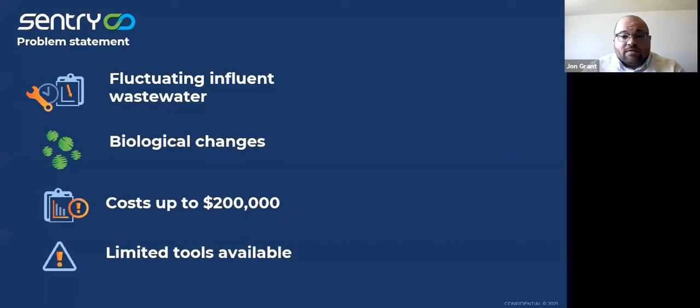And so with that, currently that's difficult. There's fluctuating influent wastewater, biological changes, and that leads to issues at the treatment plant, or in the process, that can cost hundreds of thousands of dollars. And that's because there are limited tools available, because ultimately existing and traditional sensors get covered in biofilm and have biofouling issues and have to be maintained quite often. We estimate that costs $7,000 a year, and lots of time spent cleaning and waiting for sensor drift.

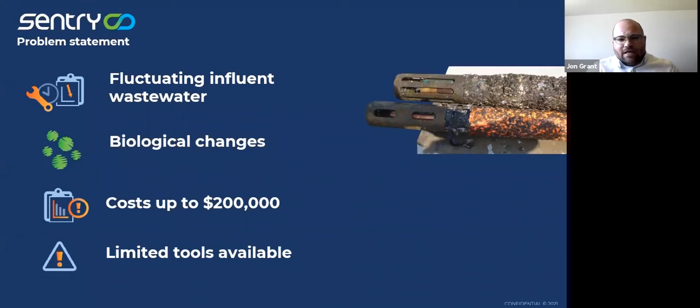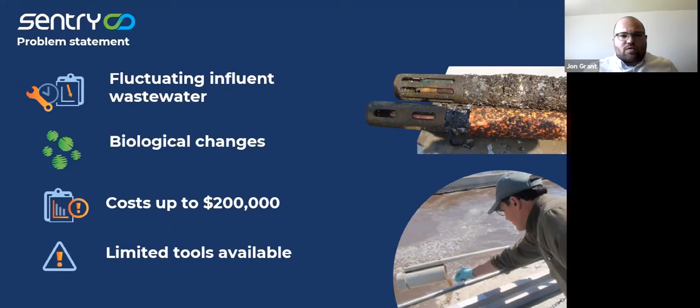So where biofouling causes other methods for getting information to fail, biofouling is actually what makes SENTRY work. So first we'll do a quick overview of what's in the system, and then we'll get into our top 5.

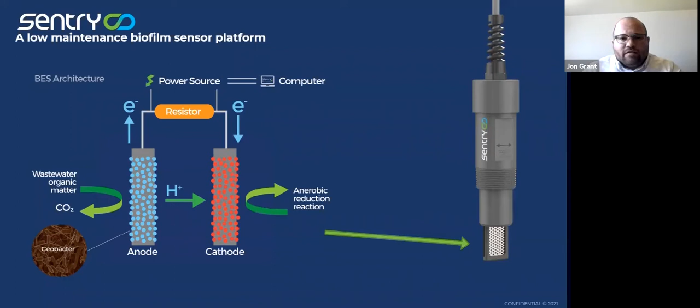At its heart, we've got 2 flat metal sheets that we prime with a small voltage to receive respired electrons from the biology as it consumes carbon. So essentially we're providing a real-time monitor to understand the biological health of the incoming wastewater, or of the plant to treat the incoming wastewater.

It comes as a standard with a panel, NEMA 4X rated for outdoors, 2 probes, SIM card connection, and it's generally plug and play. And then we typically install in channels, or really anywhere where there's a good flow that's representative of the wastewater at that current point within the plant or process.

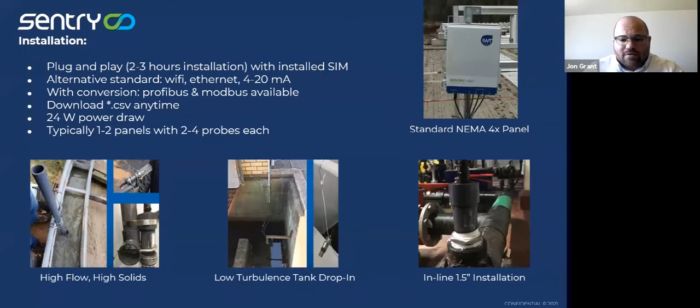And so we've got clear problem statements in a number of areas, all the way from the collection system to the effluent point. About 85% of deployments start with or include a primary clarifier or headworks type location, because it's a good place to really get a feed forward signal for what's coming into that plant, so you can actually make informed decisions about how you're going to treat that wastewater when it comes into the plant.

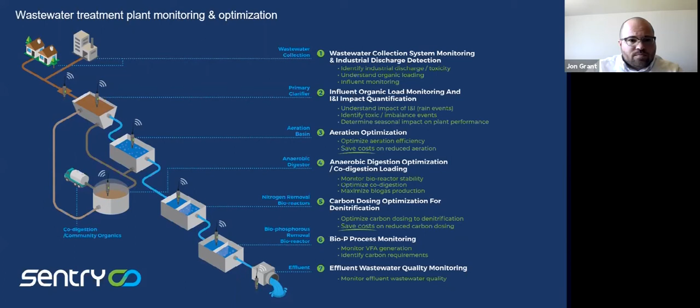Just to cap that part off, as water or wastewater flows over the probe, the biology on it is consuming carbon. So if you get a huge slug of BOD, you'll get a lot more food for the biology, and you'll see the signal go up. If there's a dilution event or toxic inhibitor, there's less food available for the biology, or it's less able to consume the available food, and so you'll see a drop in the signal. It's really like a heart rate monitor for your ability to treat the incoming wastewater.

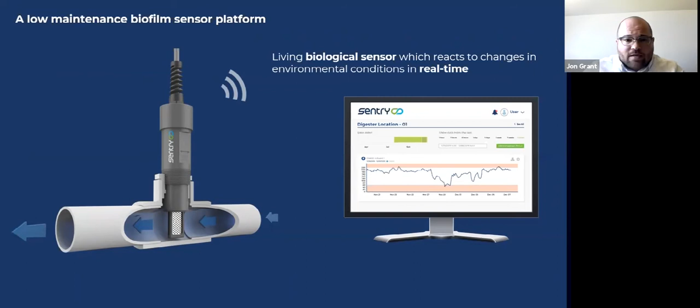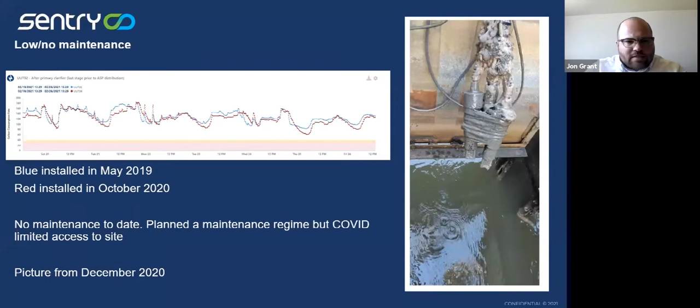And so with that, it's been a very big year. At this time last year, we had just over 55 installations. At this point we're now across North America, quite far into Europe, quite a bit in Asia, starting to get some work in Brazil, and our most recent deployment that sort of filled out the map was Australia. And then one day, hopefully Antarctica too, to complete all the continents.

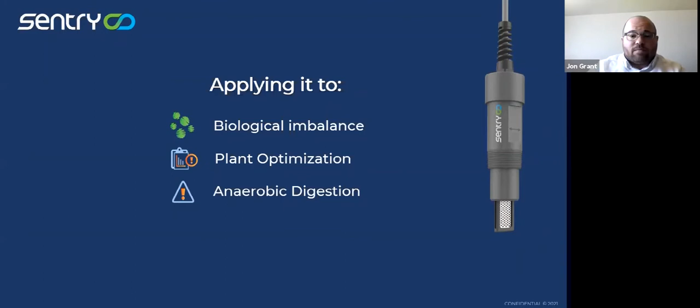So it's being applied to biological imbalance, plant optimization, and also anaerobic digestion. And we'll go through a couple of different projects. So we have a broad mix of projects that we really liked that touch on all of those different points.

The specific use cases are really in detecting both organic loading and toxic shocks. It is feed forward in real time, so you can get a very good understanding and make informed decisions. And it allows long-term patterns and statistical analysis to really make good informed decisions based on day of the week or time of day for a specific plant. Ultimately, it'll help you be a better operator, or help your team operate more effectively in the future.

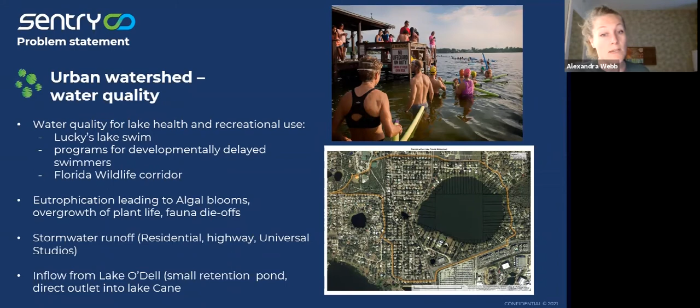One of the big questions we were trying to answer with the SENTRY deployment is whether or not the influent from Lake O'Dell was causing any detrimental impacts to the quality of Lake Cane overall and the swimming quality of the lake. So when we deployed the SENTRY system, we deployed very near to that inlet, and then a little bit further offshore into more the center of the lake, to get a better measure of the general lake health and more specifically the water coming in from Lake O'Dell.

You can see they also have a number of manual sampling locations. They were collecting data from manual sampling to compare, when our SENTRY probe is reacting, what are some of the things it's reacting to in the lake, and to get a really great picture of the lake health and quality overall.

What we were able to find is that not only is the lake impacted by all kinds of different weather events, with a really strong daily and seasonal pattern to it, which is to be expected from an outdoor freshwater lake even in a more stable climate like Florida, but we were also able to find some indication that yes, Lake O'Dell water does have an impact on the overall lake health.

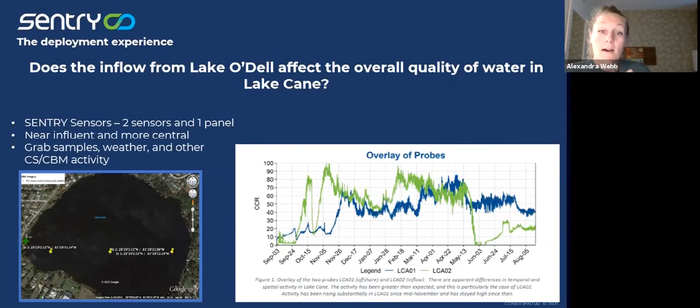Obviously it needs a little bit more research, because there's a lot of different things that impact lake health, and it's got quite a large shoreline, so there could be other things impacting that SENTRY signal. But with the information we've gathered so far, we can create a baseline to understand the lake's natural cycles, to identify when things deviate from expectations. It also allows us to flag poor water quality times so swimmers aren't swimming when quality is poor. Generally we haven't seen that too often, so that's a great outcome from having the SENTRY.

Another step that can be taken is to develop issue-specific interventions. Because we know some of that impact is coming from Lake O'Dell, instead of thinking of interventions for other places in the lake, we can look specifically at how to mitigate that incoming stormwater from Lake O'Dell. And finally, being able to promote policies in the region that will help with other impacts to the lake or with the Lake O'Dell influent.

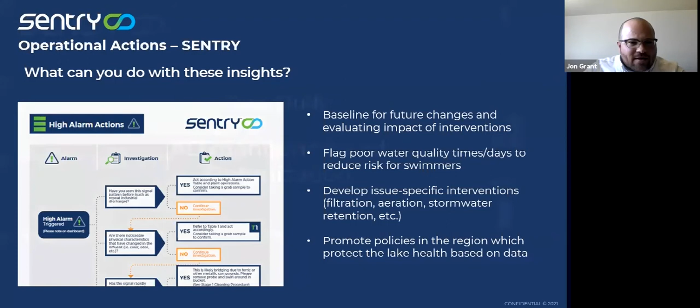Thank you, Jon, I'm very much looking forward to this. Do you want to move the slide? Who controls these slides, Alex, Selena? It's me. Fantastic, okay, oh it's you. Okay, fantastic.

So in terms of AD, the SENTRY company actually started with monitoring anaerobic digesters. When we first started our commercial deployments nearly 4 years ago, it was with the anaerobic digestion industry in mind, because high strength, high performing anaerobic digesters require really complex microbial communities all working together to take complex organics, break them down into VFAs, short chain carbon-based molecules, and then for the methanogenic communities to convert those into methane biogas, renewable energy.

The challenge is operators managing these digesters have little to no information in situ directly from the reactors to tell them, oh wait, my biomass is struggling, or my biomass is doing well. Because of that, they tend to underload their digesters, which means there's a massive safety factor. It means invariably they're not putting as much food, as much organics, through their digesters as they could, which means they're not generating as much biogas as they could be generating.

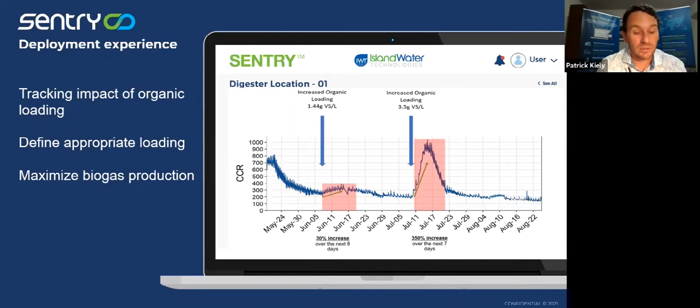And these then directly link into biogas production. So Jon, I think the next slide, if you put it up. Perfect. So in this case, basically what we're trying to assess is, okay, well, does this signal align closely with the other metrics that we're really interested in with our process?

That's certainly an alarm for operators that would then warrant them making decisions about stopping loading, reducing loading, and that's what we do. So it's digitizing how the bugs are performing in the reactors, correlating it to that key metric, typically biogas production, and really making operators a lot smarter about what's going into their digesters and how they can maximize operations. I think that's a good one, Jon.

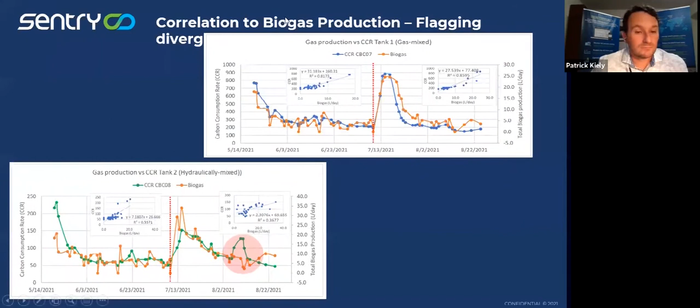Maybe I think that's my last slide. Yeah, cool. Sorry, yeah, that was your last slide, and I jumped into the next one. So yeah, no, thanks, Pat. That was a great presentation.

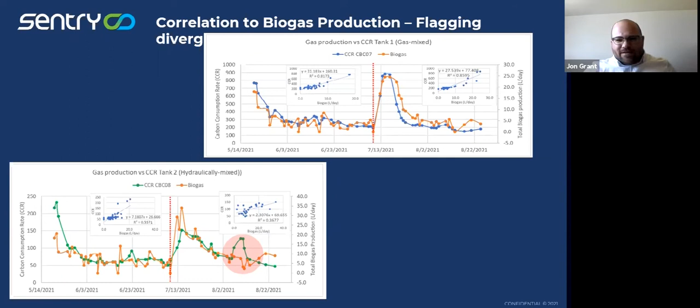And then I will lead the chat on our third one, which some of you may have briefly seen when I passed on to the next slide. I got a little bit trigger happy there. So the next one is near and dear to my heart, mostly because most folks may not know this about me, but I am actually from Kentucky, the last place I lived in the US. So technically it's close to home for me, even though I do live in Canada.

So the city of Frankfort, they're a very interesting town because they experience something at the extreme end of our most prototypical use case scenario of overloading organics from a brewery type thing. And they happen to have one of the largest distilleries about 150 yards away from the front of their plant. So they get discharges, and then right away it's hitting them.

So there was little to no warning. The plant's got a population of about, or the town's got a population of about 30,000, and really only one industrial loader, and that's the distillery. They can be sending huge slugs of BOD, but they also clean their tanks and can send down caustic or other toxic chemicals. So there's a lot of variability.

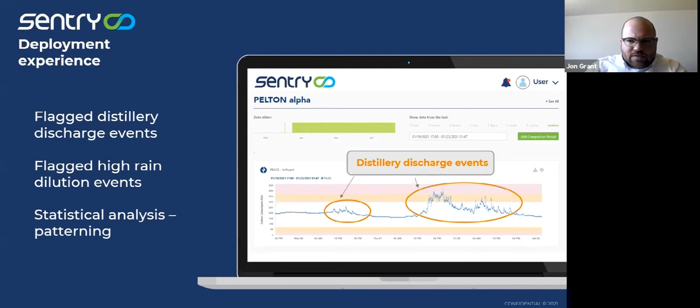So this was installed, and we started flagging distillery discharges. They work pretty well with the distillery, so they know when they're having issues, and they have pretty good communication. But there were other issues that they were facing, and so we started finding these unknown spikes pretty quickly, within a week of installing.

Then they started having a weekly pattern of every Wednesday there was a huge toxic shock. And what we found was the plant folks started talking with the collection system folks, and they were taking leachate in every Wednesday in one of their lift stations, and also cleaning on Wednesday.

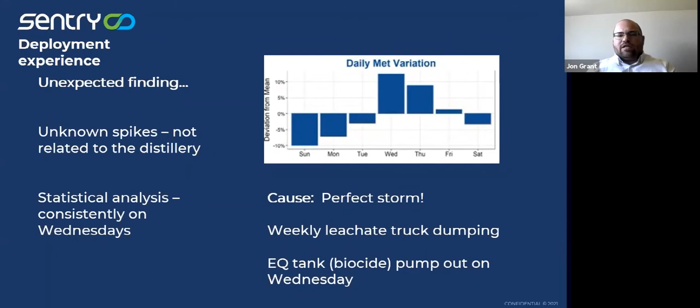So what they were able to do was coordinate to not shock the plant when possible, and it enabled them to really understand what was coming in and when, and then engage with stakeholders and their own team to put less stress on the plant. So it's a great case study for us.

What they were able to do is better manage their oxidation ditch loading. We identified that at 8 millimeters plus of rain, they're impacted. So they were able to make changes based on carbon dosing or HRT, and achieved a 5 to 10% improvement in airflow based on incoming load versus outbound. So it's a very exciting one for us.

And if anyone ever wants to visit the plant, it is right next to Buffalo Trace Distillery. So there's two fun tours to do. You can pick the order in which you do the tours.

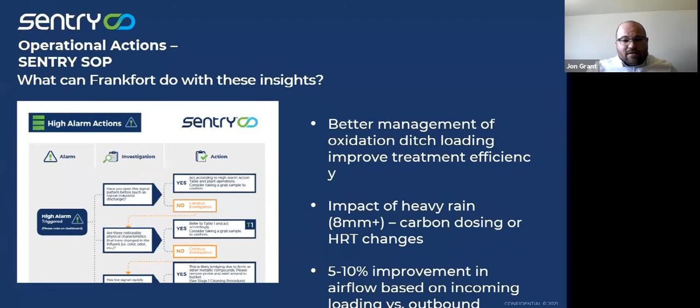Thank you, Jon. This is a great case study from FCC Aqualia in Spain. For those not familiar with FCC Aqualia, they're a service provider that provides solutions for cleaning wastewater and a number of different processes to the market. So they're slightly different from some of the cases we've heard so far, where the operators have been the owners of the wastewater they're treating. This is a third party whose wastewater was coming in, and FCC Aqualia was contracted to provide a plant to treat this wastewater. They didn't really know what was going to be coming down the line. They had no real data or real understanding of what was going on.

And this particular installation started just before lockdown as well. So it wasn't like they could be on site the whole time, monitoring and taking samples and understanding what would be happening. First slide, please, John.

So this site is in northwest Spain. It was a fish canning factory. And as you can imagine, from a fish canning factory, there's a lot of different fish wastes as various fish come through. Again, that's not a consistent setup - it's not just one type of fish being processed. So there's all sorts in that waste coming through, and the water, and the wash down of the tanks. There were equally disinfectants in there as they prepped the food spaces for processing and canning of the fish. So it's very horrific water, and you can imagine the smells that come with that.

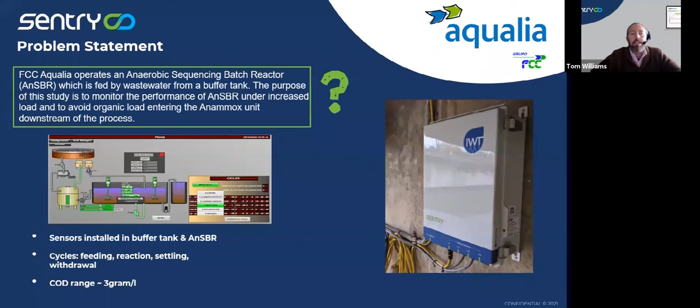Next slide, please. So this was the beginning of the process, around Christmas just before lockdown, approaching last February. The first phase was where we initially installed the probes - both probes. We had one probe in the buffer tank, so we could try to understand what feed was coming from the fish waste, and one probe in the SBR unit, so we could understand the reaction of the biology in that unit and when it was ready to pass on to the next phase.

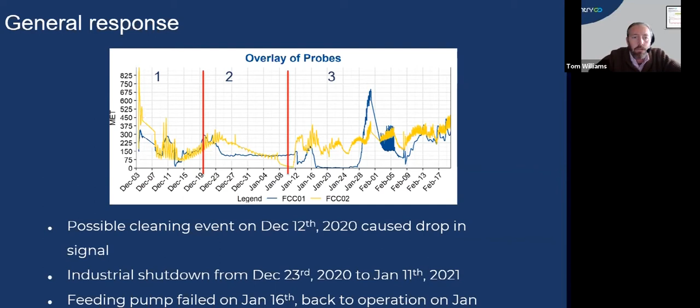So phase one, we got some good signal from the unit, and then phase two, as you see, everything drops off a cliff. What we didn't factor in, and what the team at Aqualia were very happy to understand, was not a failure in their process, but actually the Christmas lockdown. The fish were not processed over Christmas, everybody went home, everything was washed down with disinfectant, and everything fell off a cliff. But it meant that early January they were ready to restart, and the Aqualia team, even though they weren't actually on location, could see exactly what was going on at the plant and make sure the process was running fine and ready to deal with all this waste at an instant - sitting and seeing this at their desk in their Aqualia offices, rather than having to send somebody to site. Next slide, please.

And the key for Aqualia was trying to optimize that reaction to make sure that we've peaked and the carbon has been consumed, the biology has done its job, in the most efficient way, saving time. Then they're watching the drop off and saying, right, now's the time to pass it on to the next phase of the process.

Tom, can I pause you? Yeah, I love this one. This is such a great one. And it's not just for anaerobic systems, but it's basically anyone who's operating a sequencing batch reactor and wants to actually know in real time, just look at a signal and say, yeah, the sequence is finished, the bugs have eaten everything that's bioavailable, it goes to the next step. I really like this for people who are looking to shorten those cycles and not just be guessing. It's just so intuitive and so simple.

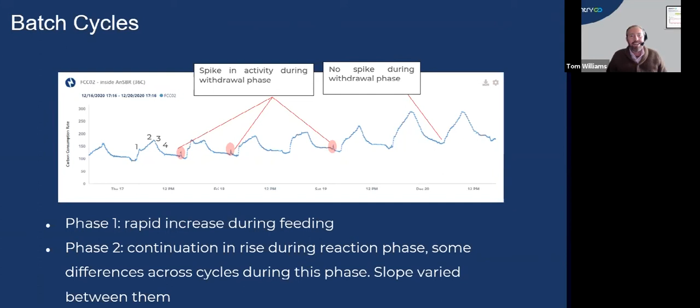Excellent. So here's a bit more detail of exactly what's going on - a bit of an examination on certain dates around this. You see here we have 4 blue spikes going on, and the third one along, we have a little dip there in the reaction. Instead of peaking as the others do and following a uniform setup, there's a bit of a drop off in the middle of the reaction. They were able to grab a couple of samples at this point and found out there was something inhibiting the reaction there in the process, and they can then take action to avoid that in the future, getting a real-time set of information that gives you that detail and enables you to react quickly and sharply.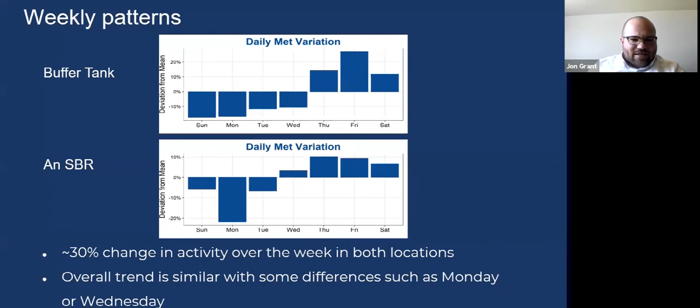Next up, we have Tim Truax presenting. I hope this one is near and dear to his heart because he used to be a client, then he retired and joined us. I've never asked Tim how long he's been working in the sector because I don't want to then tell him how old I am. So with that, Tim, I'll pass it over to you to present on the final of the top 5. Great, thanks, Jon.

The city of Bend is located in the high desert of Oregon, on the eastern slope of the Cascade Mountains, so it has a very dry climate. This is a major tourist attraction for many people living on the West Coast because it's guaranteed sunshine most days of the year, and there are large mountains for skiing, so it brings a lot of people to town.

The wastewater treatment facility in Bend is a conventional activated sludge facility. It was undergoing expansion to a 4-stage Bardenpho process while I was the manager, using IFAS as the aerobic portion of the aeration facility. Treated wastewater from this facility is used for groundwater recharge, and it evaporates as well. The ponds or lakes created there are a major birder attraction because of all the birds that find the impounded water attractive. As I said, it's a conventional activated sludge facility.

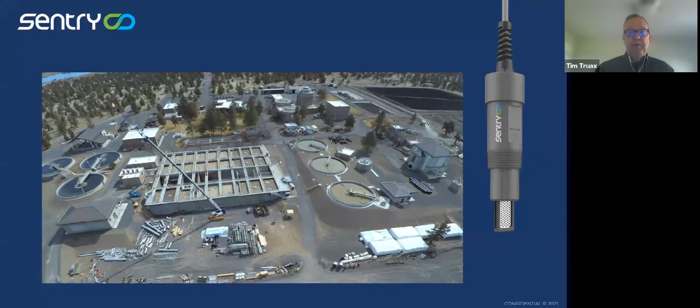This is a picture of the location of the sensor that was placed in the second primary clarifier. We found that it needed a little more movement, so we moved this sensor out into the effluent launder and created a backwater so that the sensor was always submerged, even during periods of low flow.

The population of Bend is approximately 90,000, but the population equivalent of Bend is approximately 140,000, as a result of these 24-plus breweries that are connected.

The major problem we had at this facility was very poor settling, due to zoogloeal bulking. We had selectors, so we didn't have filamentous problems, but we had zoogloeal bulking, which required very short solids retention times. Because this plant had a total nitrogen limit, we struggled with maintaining sufficiently long SRTs to nitrify in the winter months, while also keeping sufficiently short solids retention time so that the solids stayed in the secondary clarifiers.

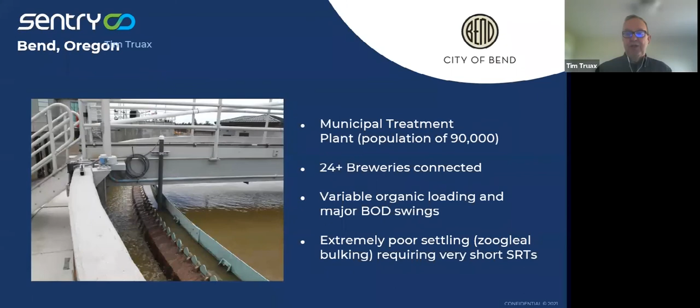Shortly after installing the sensor in May of 2020, we were able to detect brewery discharges. In this case, it was a planned discharge from the major regional brewer, indicating they had bad beer that they brewed but couldn't sell because of the lockdown underway. The normal diurnal pattern is visible on this screen from left to right, and that brewery discharge was picked up. This would not have been detected otherwise, because the laboratory only operates three days a week for monitoring influent BOD. That became a significant part of the challenge in operating this facility. We did not know when high strength wastes were coming into the plant, and there was no significant pattern involved.

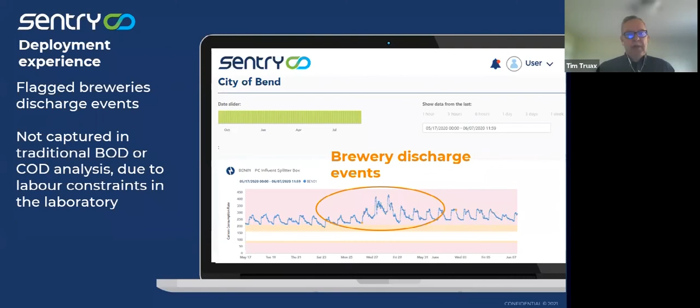As a result of installing the SENTRY sensors, we were able to understand when patterns were changing, and we almost always dealt with high strength alarms generated as a result of increasing carbon consumption rate. Strategies we used to deal with that included anticipating how much mixed liquor was going to grow as a result of the increasing organic load, and adjusting our wasting rate to accommodate the growth we'd expect in the mixed liquor suspended solids. We also had the ability to change the internal mixed liquor recycle rate.

As I mentioned, this was a 4-stage Bardenpho, so there was an internal recycle from the aerobic zone back to the anoxic zone. The idea was to increase the mixed liquor recycle rates to return more nitrate to the anoxic zones at the front of the basin when there were slug loads coming into the facility. That in turn allowed us to increase or decrease aeration during times of peak or low loading. This also helped with managing the centrate from the centrifuges or the filtrate from the belt presses. Knowing what was coming into the plant allowed us to operate it much more efficiently, reducing the amount of air or energy used, and improving our chances of meeting our total nitrogen limit.

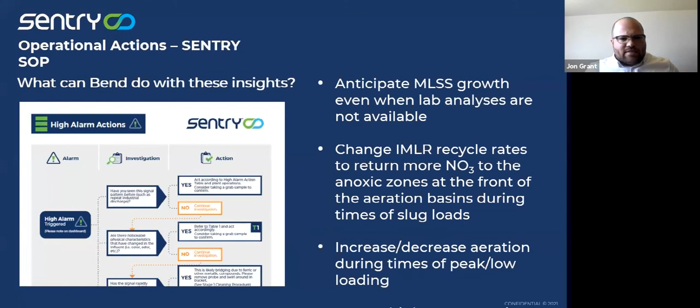As the moderator, I guess I get to ask questions on my own. So the first question I'm hoping everyone watching will always ask is, how do I get one in my facility? The answer is, reach out to us, depending on what region you are in. We have quite a few manufacturers, representatives, and partners around the world. So reach out to us or any of these folks, and we're there to assist.

These are the types of problem statements that we work on. These are the ones we love, and we're seeing some very interesting results that are demonstrating clear value to the environment and to those who are using us. So I'll skip past the thank you slide, and I'll stop sharing my screen because we can go to questions and answers.

I guess my first question, and I'll throw this one to Pat. Not to predict 12 months from now, but there's quite a few. You've seen the history of the technology, you created it. What types of clients or types of problem statements do you see being in that top 5 next year? That's a good question. Wow.

Okay, so currently 85% of our clients are wastewater. Half of those are municipal wastewater, half are industrial wastewater. I think a lot of what we're going to do over the next 12 months is profiling incoming wastewater into these treatment facilities and providing that digital fingerprint that explains to operators how the biomass in their plant is going to respond to this wastewater. I think that in itself is remarkably powerful as a data set. The challenge isn't on us doing more deployments in different places, it's actually working with smart operators and process optimization people to develop control algorithms and decision-making that takes that data and makes it valuable.